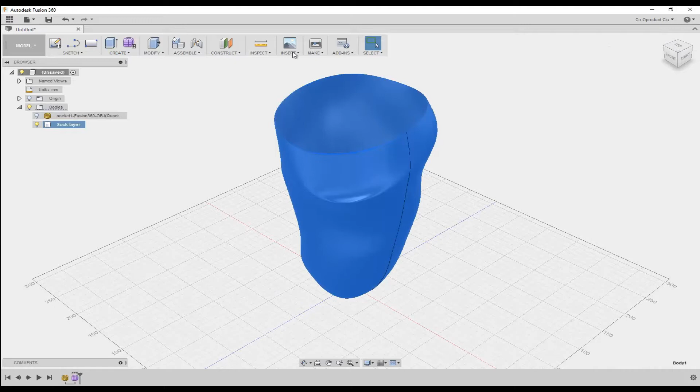Now I want to create the inner socket. To help with this, I'm going to attach some sketches to the canvas which I can use for reference. To import the sketches in Fusion, go to the toolbar, click Insert, then select Attached Canvas.

Using the View cube, rotate to the front view and select the front plane to work on. In the dialog, click to select the image, and from the dataset, locate and open frontprofile.jpg. Then click OK to close the dialog window.

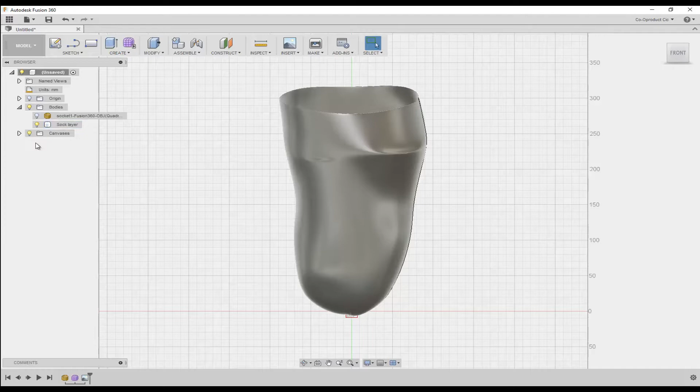First we need to calibrate the sketch we've brought in. To do that, go to the browser and toggle off the visibility for the Sock layer created previously. Then right-click on our front profile canvas and select Calibrate.

Now we need to zoom in. Click to select Zoom window and draw a selection window to get closer to our sketch. You'll note that my sketch includes a line of measure 400mm between two points. I can use this line of measure to calibrate the canvas for Fusion.

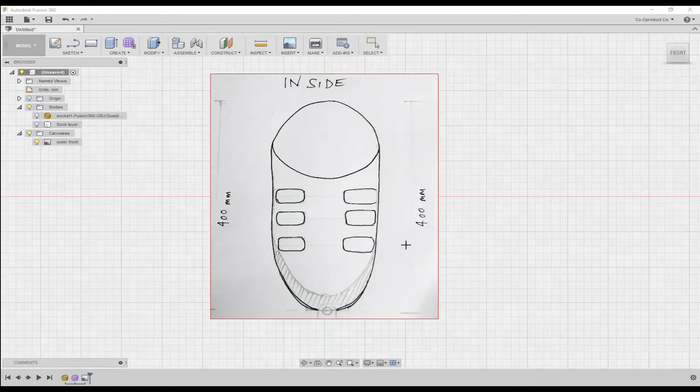I click to select the first point at the top and then click again to select the point at the bottom, then enter the measurement 400mm, and press return. If we zoom out, or click Zoom to fit, and turn on the visibility of the previous body we created, we can see our sketch is now the correct dimensions to work with in Fusion.

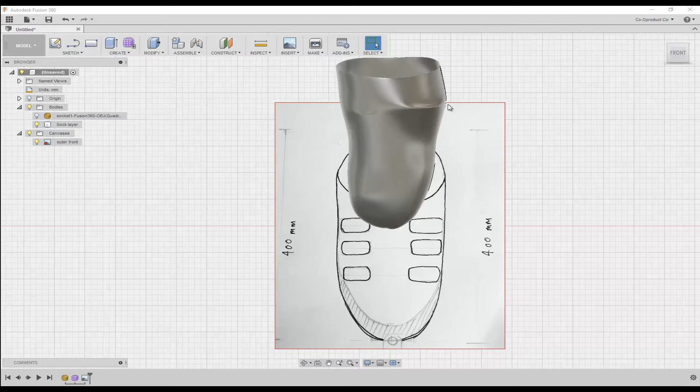If we right-click on our canvas in the browser and select Edit Canvas, we can move our sketch into the same position as the previous Fusion body we created. Our sketch is larger because it's actually the profile of the outer socket, while our current Fusion body represents the inner liner for the inner socket.

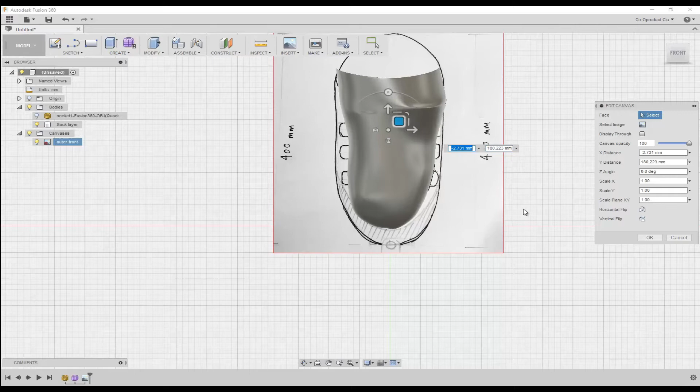Now that the sketch is in the right position, we can go to the dialog window and turn the opacity down to about halfway. Once done, we click OK to close the window.

Now we're going to attach another canvas for the side profile. Go to Insert, then select Attached Canvas. This time we're going to select our right plane to work on.

Click to select the image. This time from the dataset, select Inside Profile.jpg. Then click OK to close the dialog window.

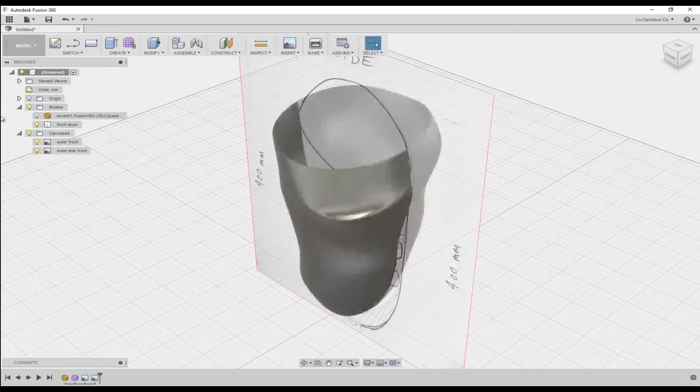We need to toggle off the visibility of the body and the front profile canvas. Use the View cube to get a right-hand side view and then click Zoom to fit. In the browser, right-click on the new canvas and select Calibrate.

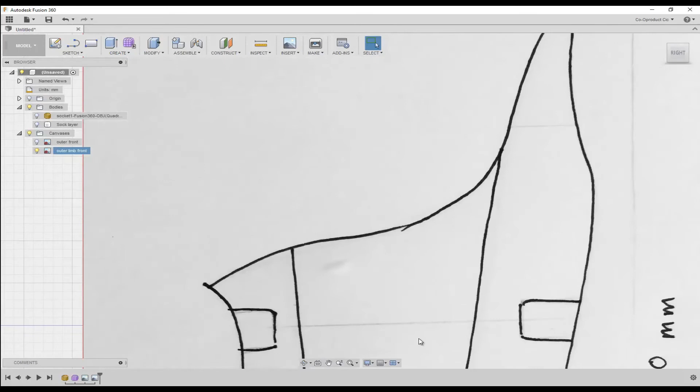Click the upper and the lower point, enter 400mm, then press return. Click Zoom to fit. Then in the browser, turn on the visibility for our body, right-click on our canvas and select Edit Canvas. As with the previous canvas, move this canvas up so its position is closely aligned with our inner socket liner.

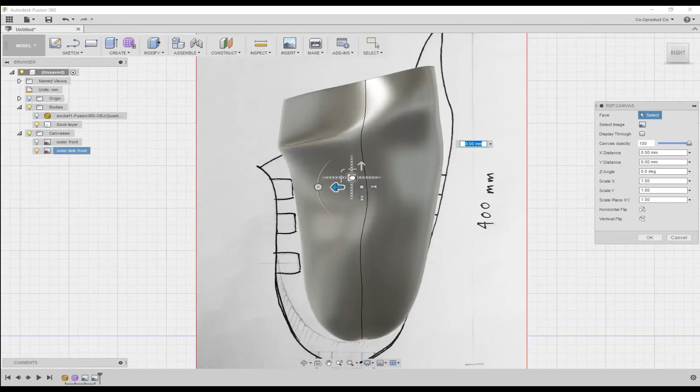I need to zoom in a little closer so Fusion will snap it to position correctly. In the dialog box, again I'll reduce the opacity to about 50%. I'm also going to check Display Through, which means I can see through the sketch onto the Fusion body. Then I can click OK to close the window.

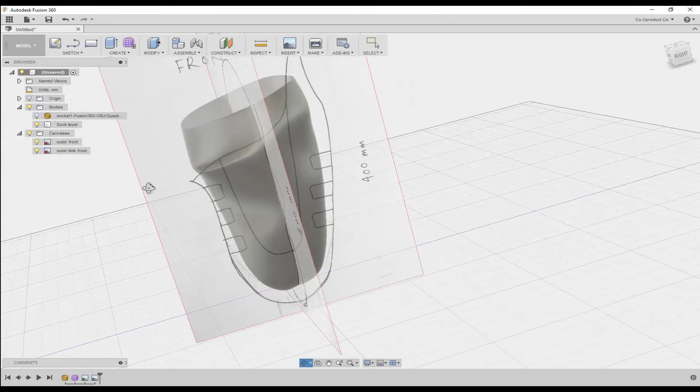If I turn on the visibility of both canvases and orbit around, I can use my profile sketches for reference during the entire socket build process.